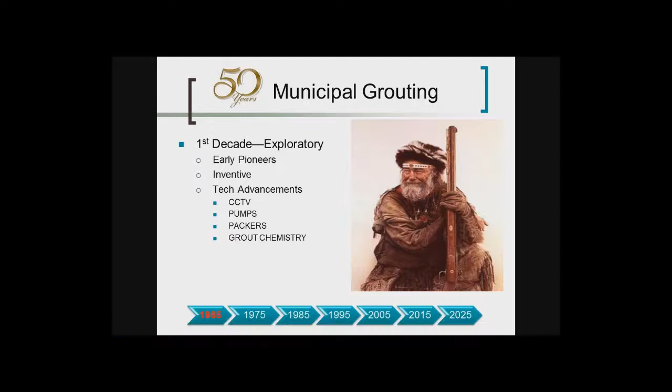The next 3 decades I affectionately refer to as Wild Wild West days. There were no industry standards, largely contractor-driven, and success stories were fairly inconsistent. Many of these current opinions and beliefs about grouting stem from this period, which is understandable and very difficult to change. In the last decade, we saw the introduction of standards.

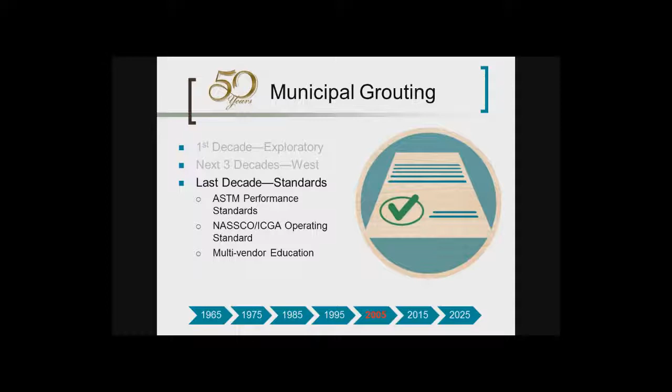Performance standards from ASTM, operating standards from NASSCO, have advanced the practice to far more predictable outcomes, and the vendor community has done well to teach these standards and preach their importance in everyday operations through grout schools and white papers.

The current decade, if I could use a single word, I would say quality is the one word that defines how the grouting community has changed so much today, much different than previous decades. There's a greater focus on science, new rules for contractors for injecting for longevity, and yes, there are certification programs on the horizon for inspectors and operators to make certain the value engineering elements of the specifications are followed to the highest degree.

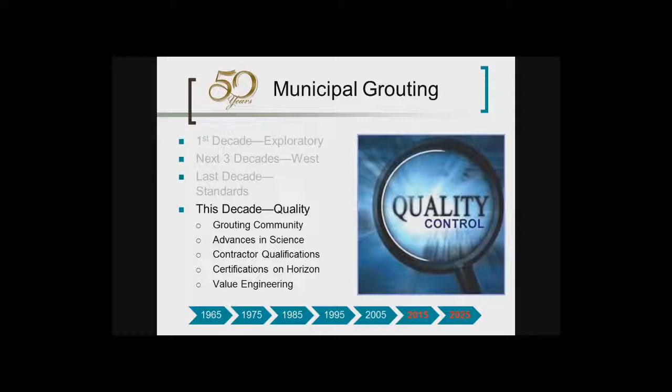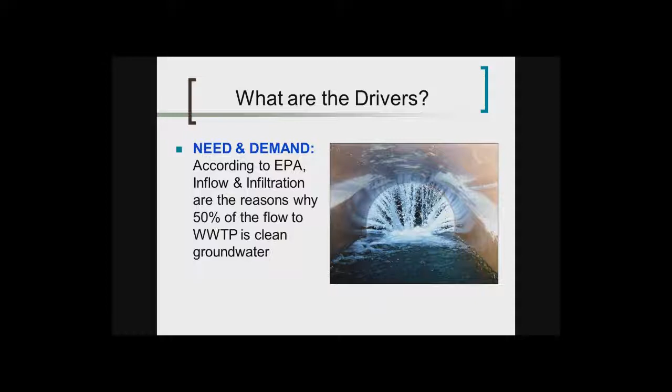So what's driving this momentum? Need is a driver. Demand is a driver. I&I is the reason half the flow to the treatment facility is clean groundwater. Not only is this a higher expense to the ratepayer, but it's also a contributing factor to the decay of underground assets, reducing the useful life expectancy of our collection system.

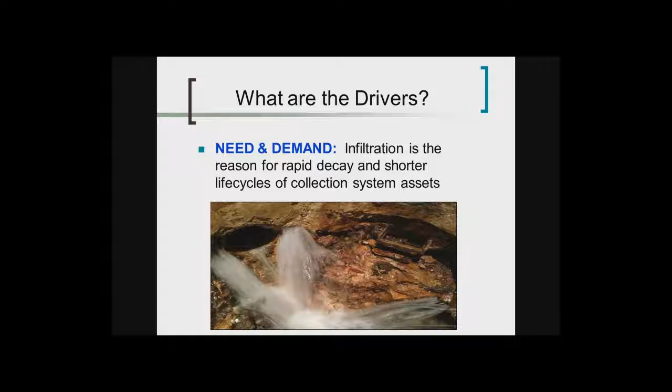In addition to unwelcome groundwater, infiltration ushers in soil fines, reducing capacity and adding municipal expense for jetting and cleaning the system.

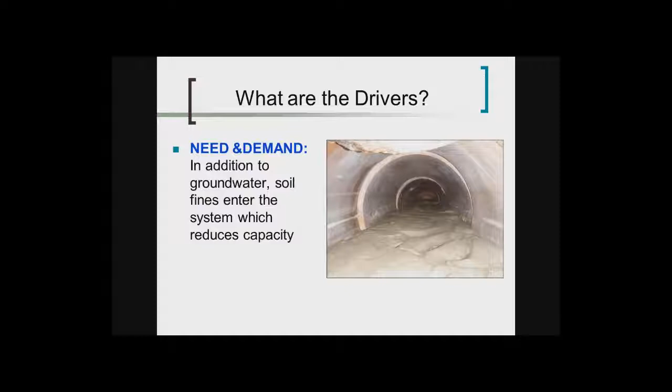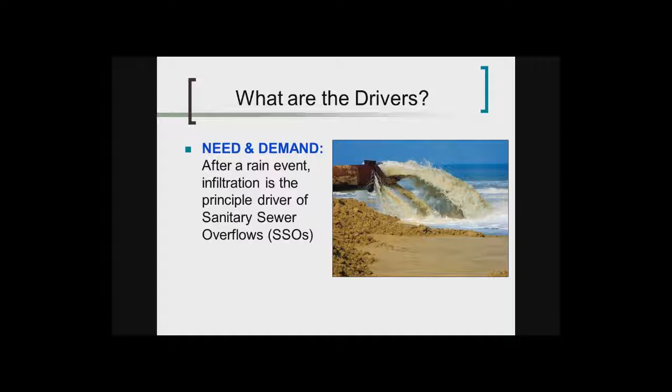Following a rain event, infiltration exacerbates conditions for sanitary sewer overflows, and nothing captures the attention of EPA greater than SSOs. Relative to the customer and ratepayer, basement backups are a public relations challenge for every municipal authority, and the public is deserving of a safe community.

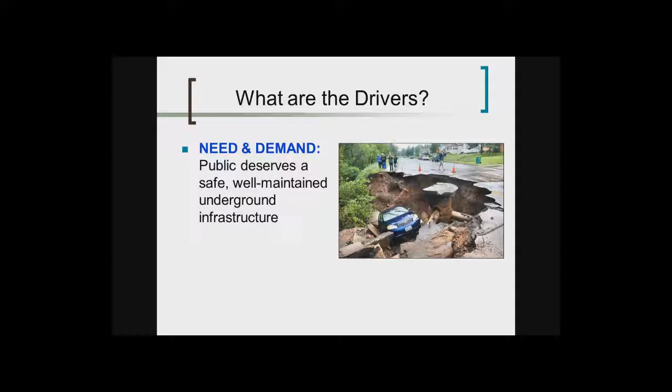Sinkholes are often the result of lack of maintenance of our underground utilities. Clearly, infiltration is the enemy. So what are we doing to maintain, repair, and remediate infrastructure?

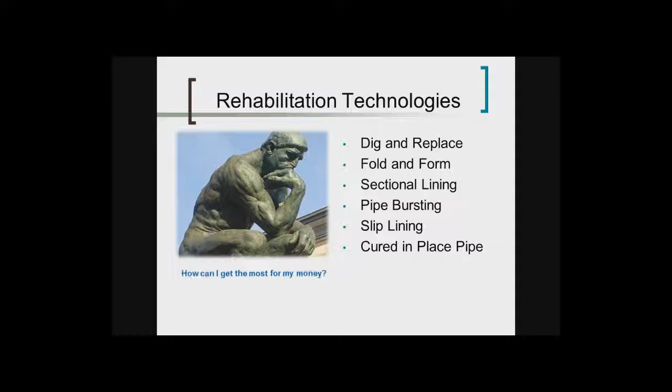Every day, I wake up grateful that these technologies exist. These are necessary and important technologies. And they all have one thing in common: they are structural, and they are also expensive.

Injection grouting is non-structural, generally speaking 25% of the cost of lining. Grouting is a complementary technology to lining versus a competing alternative. Your condition assessment guides you to an execution plan that may include both lining and grouting.

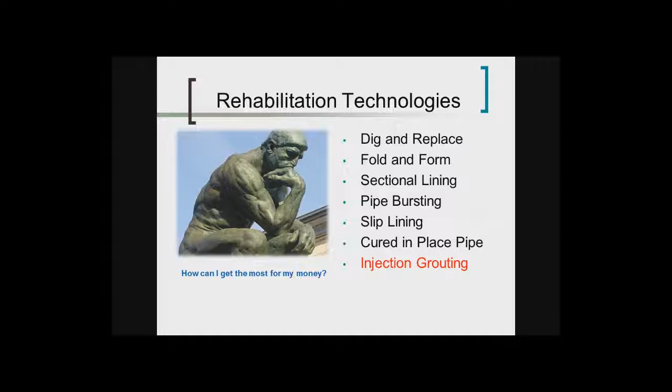And for structural rehab, lining is necessary. And if 80% of your defects are infiltration problems, injection grouting is engineered specifically to stop infiltration. Grouting is the only technology that stops infiltration at all four points of entry. To beat infiltration, a holistic approach targeting all four points of entry is required.

And that includes manholes, main lines, laterals, and lateral connections. This is exactly the wisdom you're about to hear from our next two presenters.

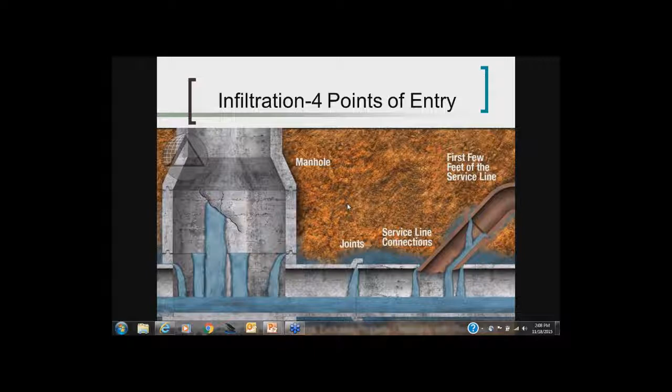As Don said, my name is Tony Conn. I'm the Wastewater Collection Pumping Supervisor for the City of Naperville's Department of Public Utilities. And I'm just going to go over a quick overview of the City of Naperville.

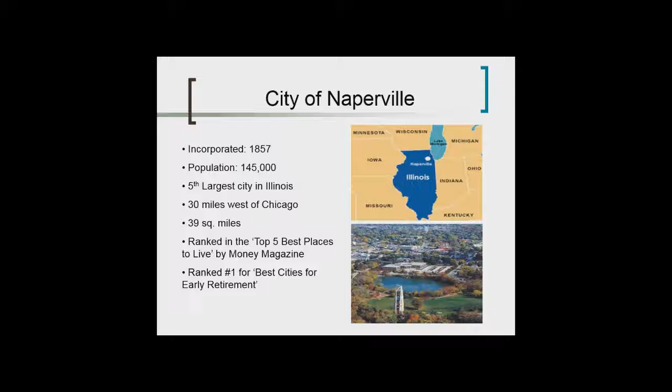We're about a population of 145,000 plus. We're about 30 miles west of the city of Chicago, with about 540 miles of sanitary sewer and just under 42,000 customers. We have one wastewater treatment plant, and we also treat the wastewater from one satellite community.

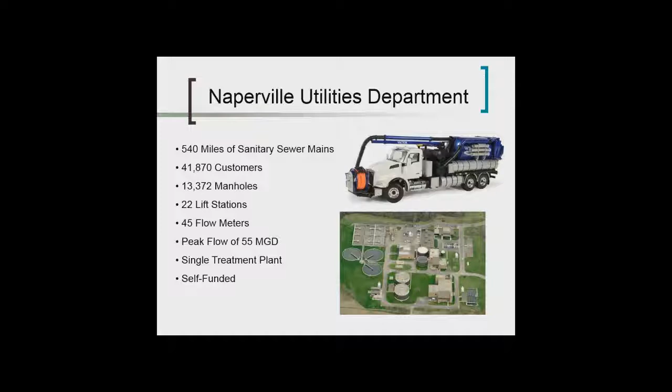Just a quick review of the sanitary sewer rehab work that's been done in the city of Naperville. Manhole rehab timeframe: we started in the late 80s with doing manhole renew, that is a poured-in-place manhole process.

And then in the mid 90s, we started using Permacast, that's a spun-in-place manhole process. Both of these processes were done in-house.

And then about 2001 to current, we started using SprayROQ, Raven 405, cured-in-place manhole liners, and Spectra Shield. These processes are used when the entire manhole needs to be redone, and they're also outsourced to licensed contractors.

If there's only an issue with the upper structure, in the city of Naperville we use LMK's cured-in-place chimney liner, and that work is done in-house.

Mainline lining: mainline lining we've done started in the early 90s. We use many different types of linings - inverted, cured-in-place, fold-and-form, pulled-in-place liners - and recently we just did several demos with ultraviolet cured-in-place pipe, which is a great product.

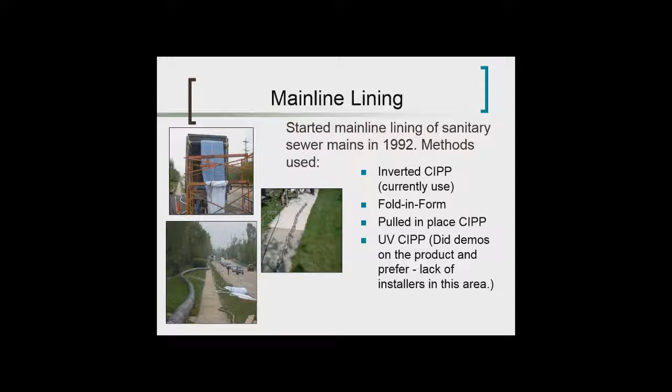It's just the issue that we're having in this Chicagoland area is there's a lack of installers for the UV cured-in-place process.

Lateral lining: we began lateral lining in the early 2000s. Before that, we were doing open cut and pipe bursting in-house for our lateral rehab work.

Currently, city crews locate laterals 18 feet onto the private property, and then city crews install a cleanout at that location. At that point, the laterals are lined with LMK's T-liner, and we go from the main line all the way to where the cleanout is installed.

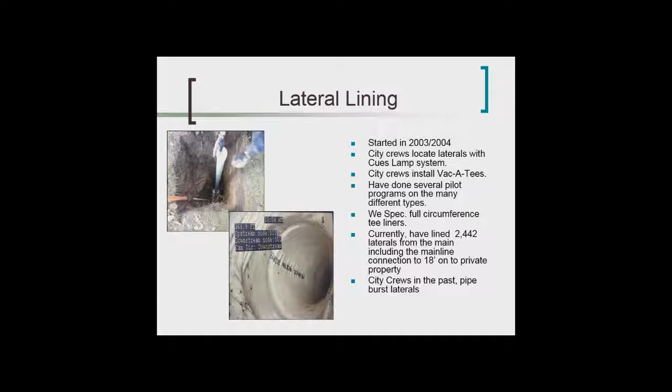This is done for two reasons: to get away from any storm sewer crossings, and to try to get the rehab work out of the groundwater table if possible.

In Naperville, we began mainline grouting back in the early 90s because of the large lining projects we had going on. The grouting got pushed back a little bit. The largest pipe done to date is a 36-inch reinforced concrete interceptor, done as part of a lining project to stop water migration and prevent resin washout when the liner was installed.

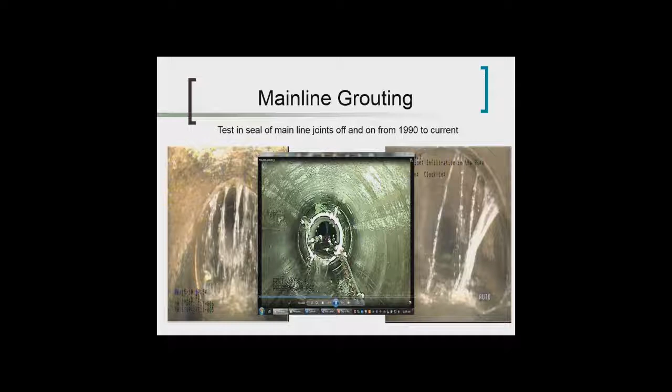Lateral grouting, test and seal of lateral connections, started around 1999 with just the first 4 to 5 feet being grouted, including the mainline connection. This was also pushed back due to our large lateral lining program in the early 2000s.

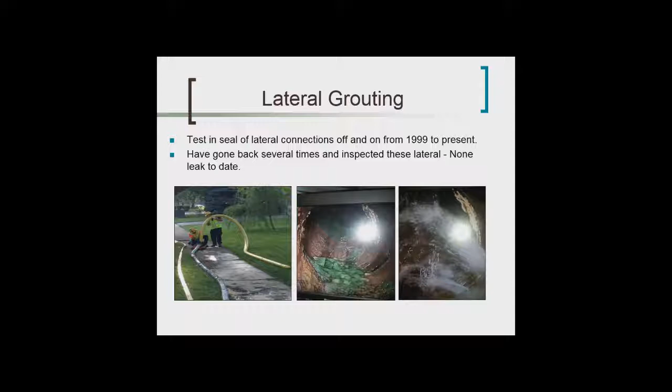All of the services that we grouted have been checked several times over the last several years, only under saturated ground conditions, and I could happily say that every single one we grouted shows no signs of leaking.

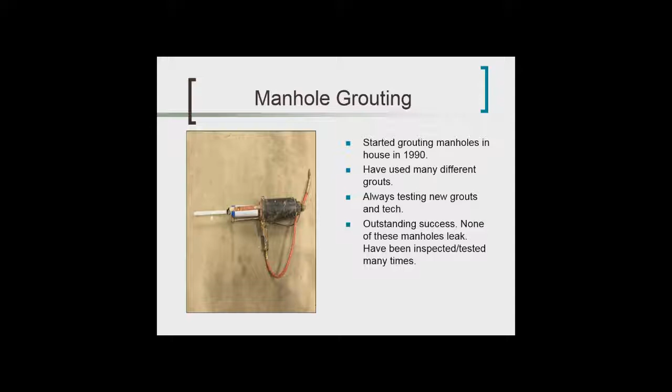Manhole grouting is done in-house with city crews. We've used many different makes and types of grouts, like urethanes and acrylamides, and sometimes both on the same manhole, depending on the situation. We've had some very great success with our manhole grouting process.

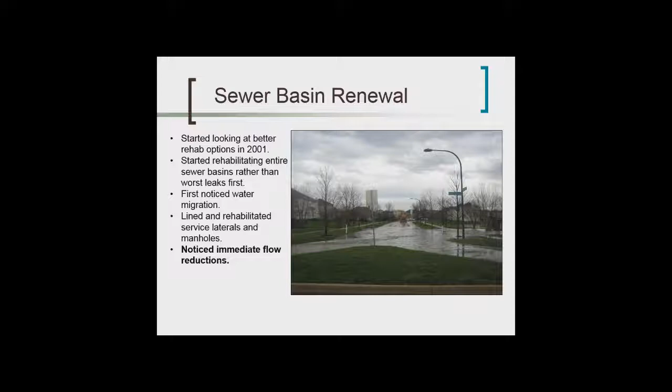Sewer basin renewal. After the 2001 rain event, we started looking at a better way of doing our sewer rehab work. During this rain event is when we really started noticing the issue with water migration. This is when we started rehabbing an entire flow basin instead of just jumping around fixing the worst leaks. After rehabbing the entire flow basin is when we really started to notice true flow reductions.

During a heavy rain event in April 2013, Naperville had about 7.48 inches of rain in a 48-hour period, resulting in a lot of flooding, a lot of street closures, and some basement backups.

After reviewing areas of all the backups where we had customer service calls, our flow monitor data, and our groundwater data, we prioritized some of our I&I rehab efforts to the Cress Creek area, which is the area we're really focusing on in this presentation.

After televising over 58,000 feet of sanitary sewer main lines, inspecting and locating 450 laterals, and inspecting 355 manholes, it was decided that the rehab of the main lines, manholes, and laterals was needed.

The problem was that the groundwater level was too heavy. All the groundwater leaks were too heavy just to line everything. Leaks had to be stopped first to prevent resin washout when we were installing our new cured-in-place liners, and before the manhole rehab process could be used.

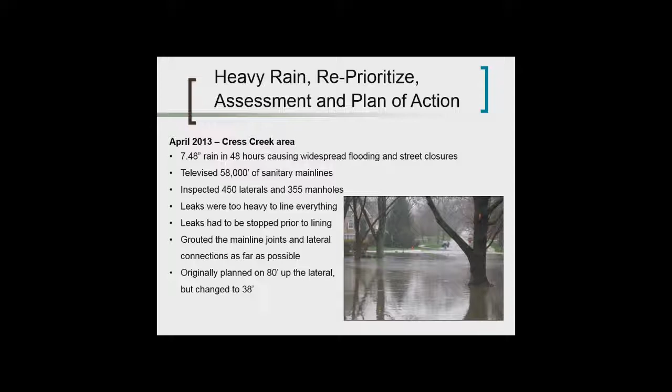We decided to grout the main line joints. We grouted the lateral connections and laterals as far up the service as possible. We originally wanted to go 80 feet up the lateral, but we ended up having to settle for 38 feet up the lateral.

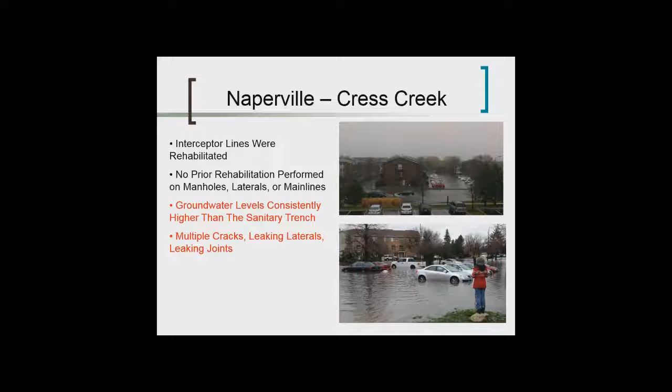At the time in the Cress Creek area, only the 24 and 27-inch interceptor and its manholes were rehabbed. The problem with the Cress Creek area is that the groundwater table is always high, and the sanitary sewer mains and laterals are constantly underwater, below the groundwater table.

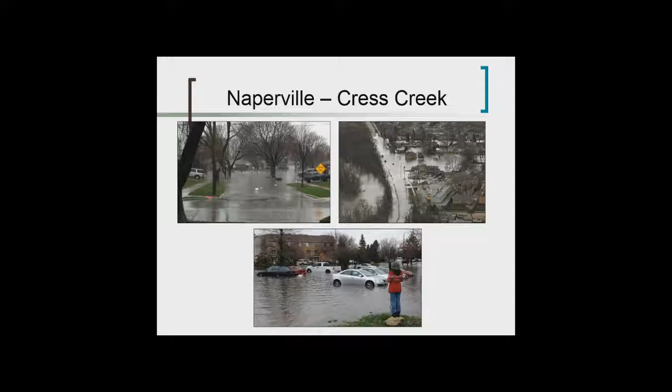Some slides of overland flooding during the 2013 rain event, and more flooding from the 2013 rain event in the Cress Creek area.

Water migration. After many years of our sewer rehab work, we noticed we were still getting high flows during heavy rain events. After lining mains for many years, we began televising this work under saturated ground conditions.

We noticed how the water was actually migrating between the host pipe and the liner and coming out where the service connections are reinstated, and also noticing water migrating to the termination points at the manholes.

During one of our large interceptor lining projects, you can actually see the groundwater table changing. The colors of the manholes were getting darker. Manholes started to leak. Service laterals that never leaked before started to leak. The water just migrated to all these defects.

This is when we decided to start grouting main lines before doing cured-in-place installs, to stop the water migration between the host pipe and the liner. Rehabbing the whole basin — the mains, the manholes, and laterals — to control the water migration is where we actually started noticing, again, true flow reductions.

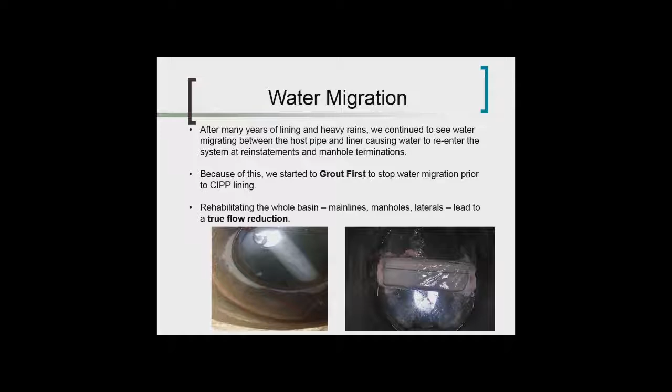Back to the manhole terminations, we also started using Insignia end seals and also Sikadur 31, both of these processes to seal the area between the host pipe and the liner at the manhole terminations.

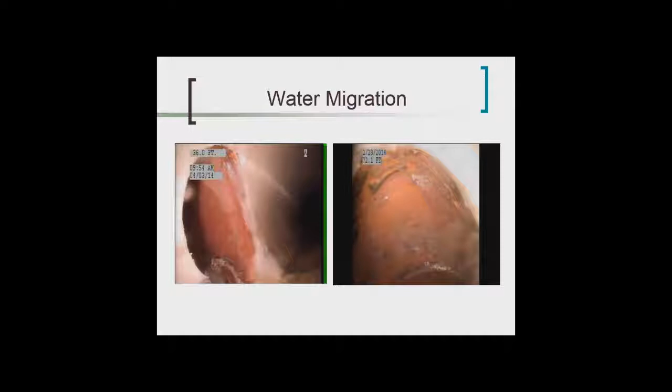These pictures show groundwater leaks between the host pipe and the liner at every service reinstatement. The photograph to the left shows water migrating and leaking between the host pipe and the liner at the top of the service connection and the bottom. The photograph to the right shows the groundwater leak between the host pipe and the liner at the top of the service connection.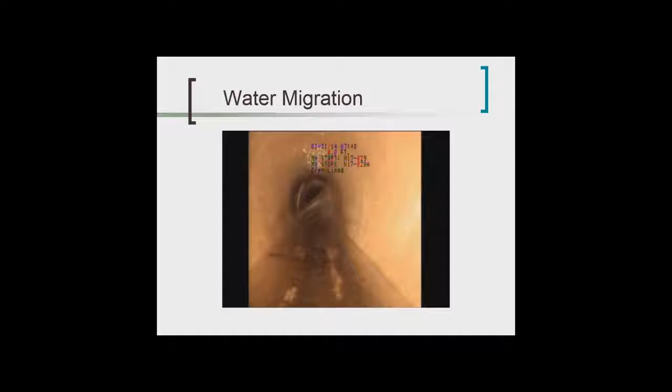The scope of work in Cress Creek: the city of Naperville lined with cured in place pipe over 57,000 feet of main lines and rehabbed 349 manholes with the Spectra Shield lining system. The last six are being done under the current manhole rehab contract with Raven, 250 mils of Raven 405.

These laterals will be grouted to stop groundwater leaks in four phases. Laterals are not being lined at this time because our service line lateral program is already committed to other areas, and the groundwater leaks have to be stopped before we can line these laterals, or we're going to have resin washout.

As part of Cress Creek, we first grouted about 2,500 feet of 12-inch clay pipe and 56 laterals. This was done for several reasons: to seal the main line joints to minimize resin washout when we installed the cured in place liner. If you have resin washout, obviously you're going to have soft spots and the liner is going to fail.

Another reason is to stop groundwater infiltration between the host pipe and the liner, and to prevent groundwater from backing up into basements when the cured in place liner was installed. That was a huge concern. We didn't want any basement backups with clear groundwater while we're trying to rehab the sewer line. Another reason was to minimize bypass pumping.

The goals were to prevent any future wastewater backups during a heavy rainfall event, to reduce I&I to the flows to a downstream pump station, improve the life of our sanitary sewer system, improve its performance, and of course reduce I&I.

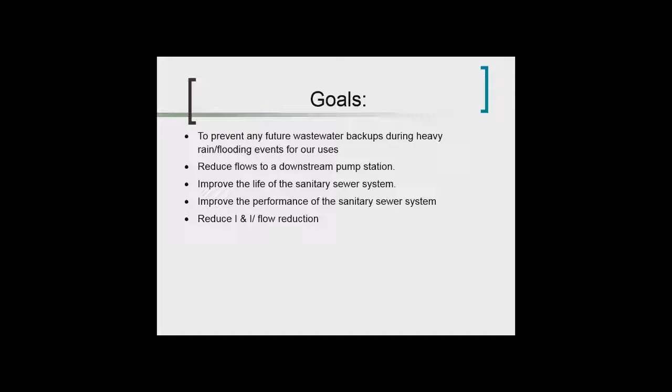Current results: this is an area that was grouted and treated with cured in place pipe and grouting, comparing June 2013 flows to June 2015 flows, which happened to be the wettest June in Illinois history. You'll notice we had 2.2 more inches of rain in 2015 than in 2013, and our groundwater level was 4.3 feet higher in 2015 than in 2013.

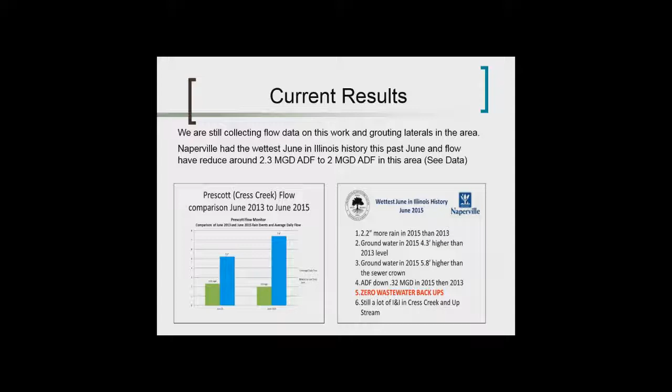But in 2015, our average daily flow from this basin was down 320,000 gallons, and we had zero wastewater backups, again, during the wettest June in Illinois history.

This is another graph showing flow reduction in an area where the entire flow basin was rehabbed using cured in place on mains and laterals, and grout and Raven 405 on manholes. Between 1999 and 2011, flow comparison shows our flows have gone down 760,000 gallons on an average daily flow.

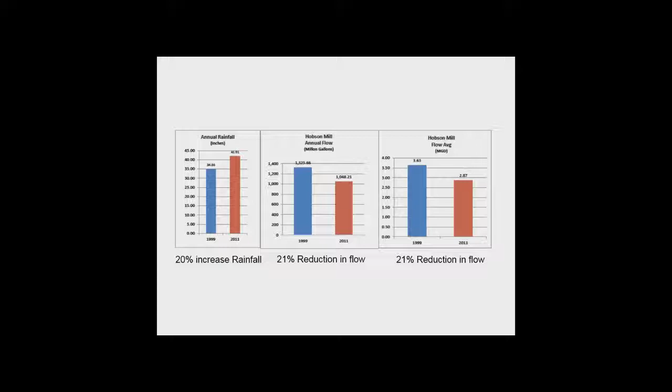This graph is showing citywide flow reductions. It shows how the city of Naperville's population has gone up, but the flows to the treatment plant have continued to go down, comparing our 2000 flows to our 2014 flows.

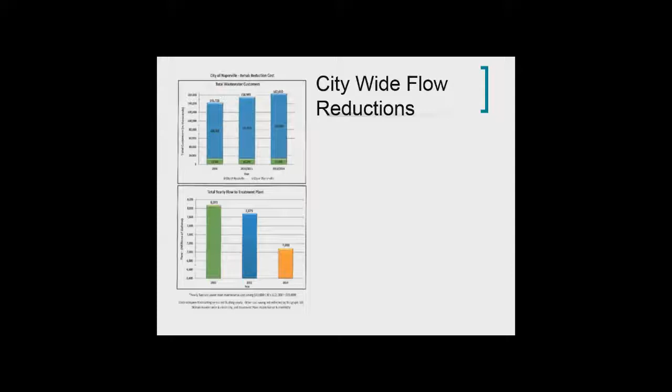Thanks, Tony. Hi, everybody. John Manijak, National Power Rodding.

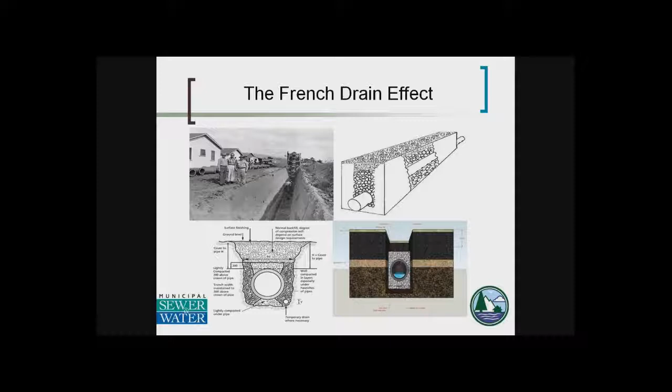When we first built our sewer systems, we dug a trench, laid the pipe, backfilled it with rock, and then covered it up. Now we have systems that have open joints, cracks, fractures, break-in taps, and there is virtually no difference now between what we have and a French drain system.

Water migration is real. Water flows along the sanitary trench and surrounds our pipes. It enters the sanitary systems through any open point.

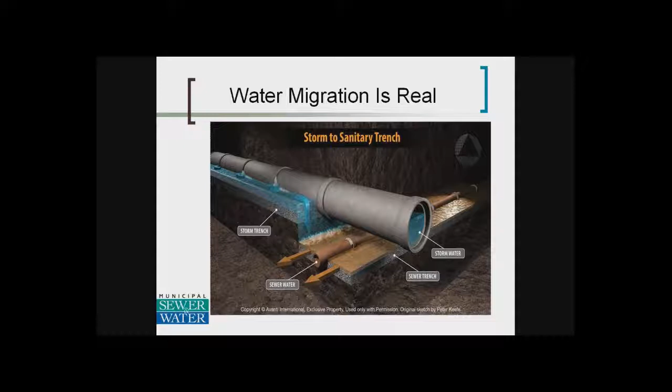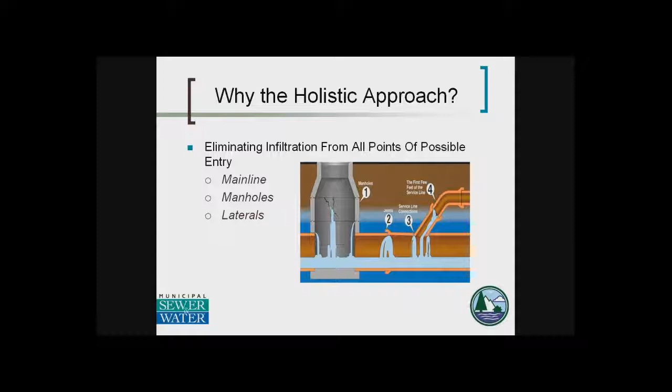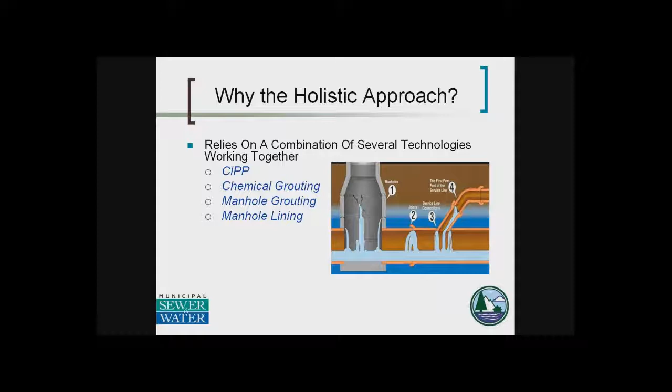And that is why the holistic approach to eliminating I&I really works. You need to address every possible point of entry: the manholes, the main lines, the lateral connections, and the laterals themselves. The holistic approach relies on a combination of several different technologies working together in order to eliminate any source of infiltration.

Cured in place pipe is a great structural solution to cracked and fractured pipe, but it is a known fact that cured in place pipe has an annular space, and many of us have lined a lot of pipe with the idea that it will completely stop infiltration.

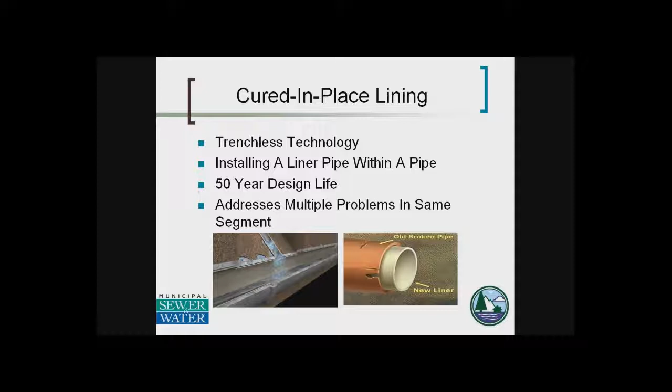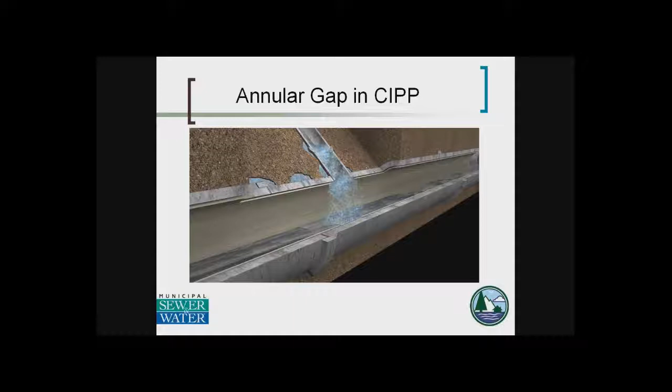The fact is that cracks and open joints are still in the host pipe, and water will enter them. It'll travel along that annular space and then re-enter the system at the lateral reinstatements. The only way to eliminate this problem is to line or grout the lateral connection.

We can seal lateral connections in lined pipe with chemical grout by using a lateral packer, which you see here, and a lateral sock, which is the yellow piece. The packer is pulled into place, it's lined up with the lateral connection, and both the packer and sock are inflated.

After failing an air test, the chemical grout is then pumped into the annular space and through the open joints of the lateral to the outside of the pipe, where it gels and seals. It seals both the lateral and the lateral connection, and actually seals the annular space. An air test is then performed to verify that the pipe has been sealed.

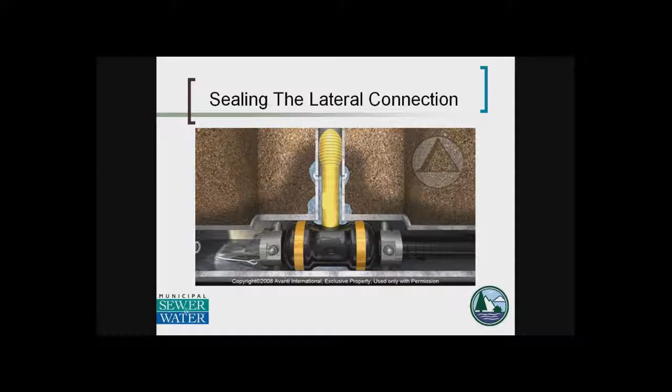In the Naperville Cress Creek subdivision, on this particular street in pink, the laterals and the main lines were leaking so badly that cured-in-place could not be attempted, because the incoming water would have washed out the resin before it would have cured, and then we would have had a failed liner.

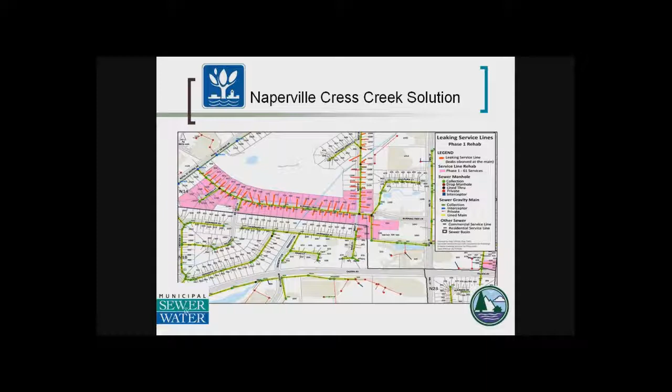National Power Rodding was hired to grout the laterals using a 38-foot lateral sock. In order to prepare for the successful deployment of that sock, we set up a main line and a 50-foot lateral in our shop and practiced the insertion of the equipment and the sock itself.

We determined that it would take a minimum of 4 minutes for the grout to reach the end of the sock and then saturate the ground outside that pipe. We experimented with different grout mixtures in order to give us the desired 4-minute reaction time that we wanted.

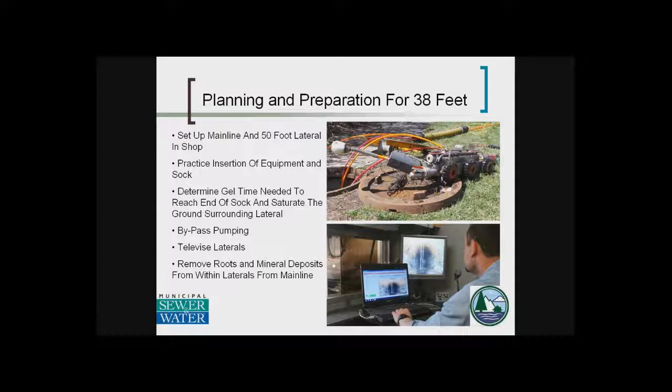When they say that the first days are always the roughest, they weren't lying. These are some of the pictures from our first day out there.

The lateral sock above ground is in yellow, and the gray piece that you see next to it in that top picture is the 45-foot tail, the housing for that sock. That also had to be inserted into the manhole.

It was also the middle of the summer, so the outside temperatures really affected our gel time. The crews had to learn to cool down the chemicals in order to get back to our 4-minute reaction time.

Once we got everything in place, we had to adjust our vacuum pumps and actually add a supplementary vacuum, because the additional water in the line was preventing the sock from coming out and going into that tail.

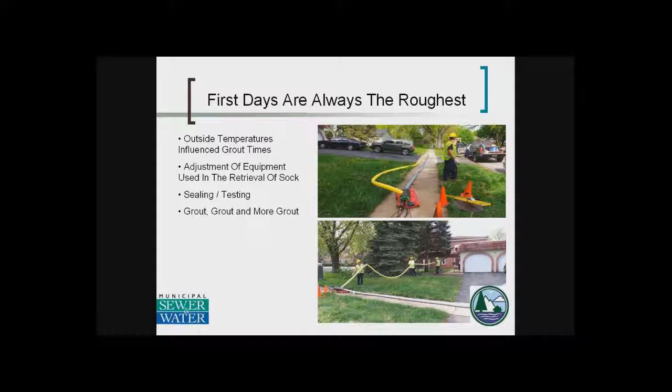Now there were a number of lateral connections that had multiple connections or multiple laterals wyed together before they connected to the main line. For these, we used a sausage packer, such as the one you see in the third picture, in black.

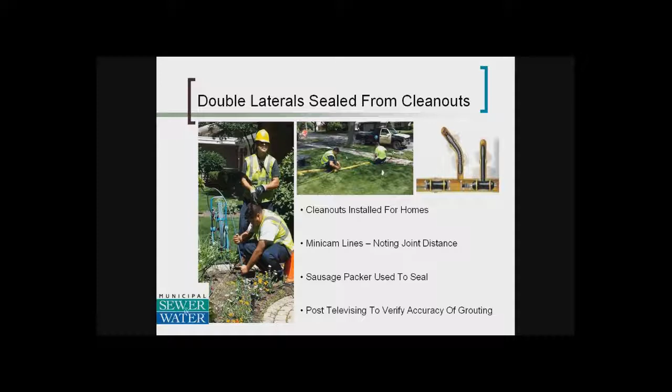That was inserted through the cleanout and then pulled to each joint of the lateral. Each joint was then grouted individually.

And then finally, to complete the process, all of the mainline joints were sealed using a mainline sealer and the test-and-seal method.

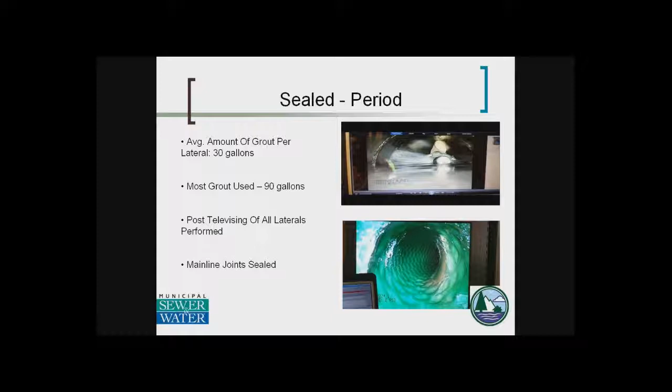And it's never over until it's over, is it? After the grouting was completed, the main lines were lined, and the only thing left to do was line the manholes. That's when Tony called me and said, hey, we have a problem. The water we stopped from coming into the lines and laterals actually migrated to the only other point of entry, the manholes. So we sent the crews back out and grouted the manholes so the lining could be completed.

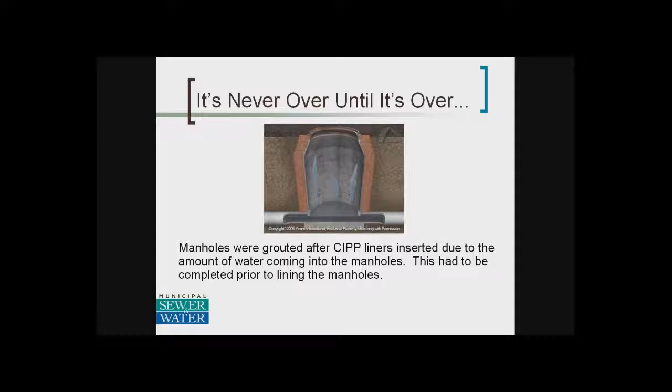Thank you, Luke. Our first online question: how do you know grout will stay in the annular space between the host pipe and liner?

Well, I'll answer that one. That's actually a very, very good question. I've been asked that many times before. When we grout, we use an air test to confirm the joint or space is sealed. To determine the pressure at which we test, we calculate the maximum head pressure we'd have at the level of the sewer line. So we take the level of the sewer and divide by 2, then add 2 psi. If a sewer is, for example, 20 feet deep, we divide by 2, giving us 10, then add 2 psi, so we'd test at a minimum of 12 psi. If it holds at 12 psi for 30 seconds to a minute, I know there's no possible way the head pressure from the groundwater would push the grout out of that annular space.

Thank you, John. Now let's do another quick poll question. In your opinion, is injection grouting for municipalities an engineered construction project, a proactive maintenance practice, complementary to other trenchless technologies, a short-term point repair tactic, or all of the above?

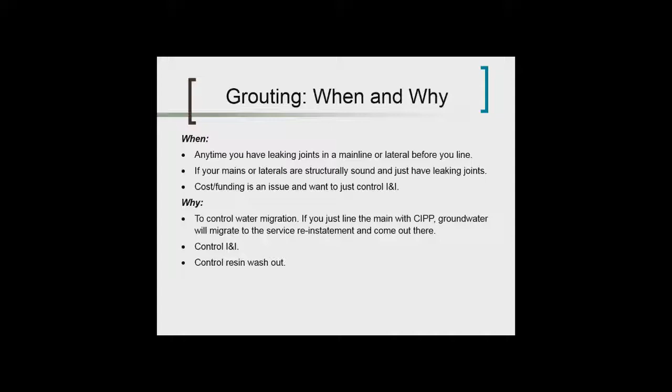Lining, when and why? Anytime you have a structural issue, when the system is at the end of its life cycle. And why line? To improve the life of your assets, improve the structural integrity of your assets, and by lining the main and the lateral, you can reduce your maintenance cost — for example, flushing on a longer time frame compared to an area where you're root cutting or doing root control yearly.

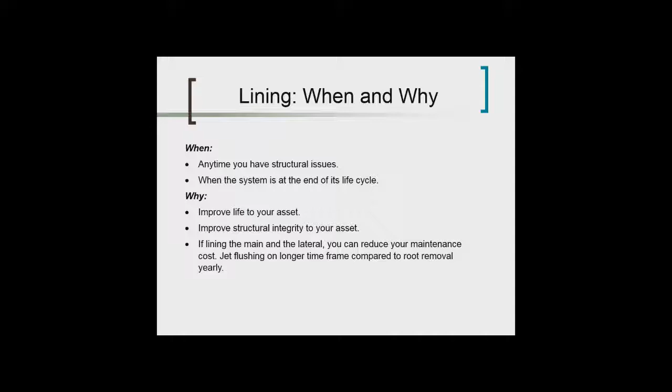The next phases of grouting in Naperville will be done with National Power Rodding, grouting 312 service laterals from the main line to the foundation of the home. This is being done in 4 phases over 4 years.

This process will include grouting the mainline connection up 4 feet with a lateral packer, grouting from the cleanout to the mainline connection, and then flipping around and grouting from the cleanout to the foundation.

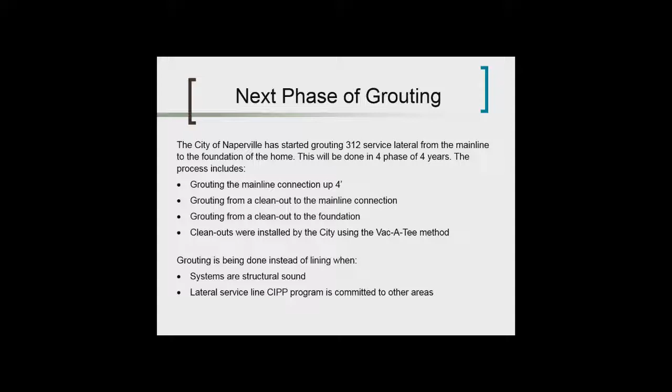The cleanouts for this first phase were installed by the city of Naperville using the Vac-A-Tee method. Grouting is being done here instead of lining because the services are structurally sound and our current lateral lining cured-in-place program is already committed to other areas.

Future grouting: this is just the first phase of the 4 phases. Again, the mainline connection and the laterals from the mainline connection all the way to the foundation of the home are being grouted. It's approximately 62 homes.

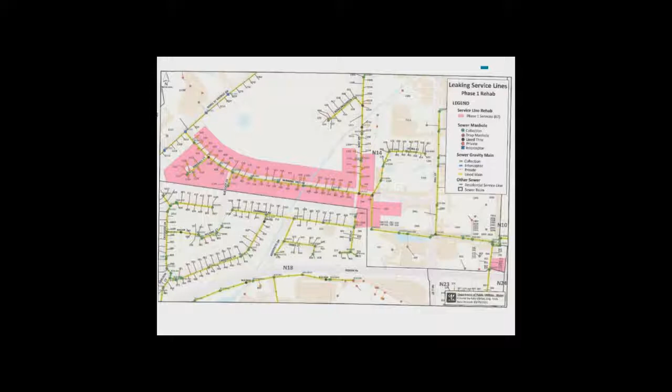Working in private property, using public money on private property, all it does is benefit the public good. Reducing I&I in private property benefits both public and private parties. One of the biggest things is keeping everybody educated on how handling private I&I will control many issues. Always keep your city council and boards involved, and talk to homeowners associations and private owners, keeping them involved also benefits the program.

And with that being said, I'd like to pass it on to John.

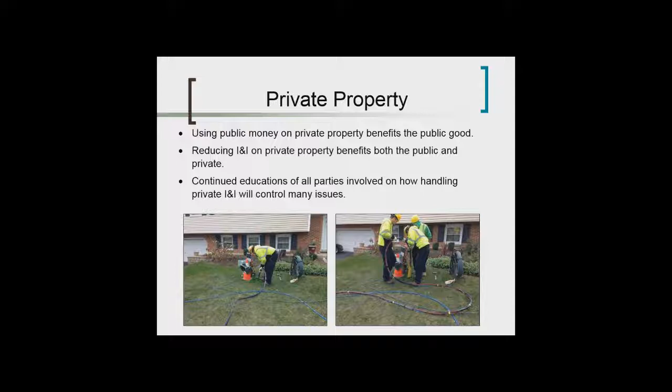John, you're now presenter. All right, there we go. Thanks, Tone.

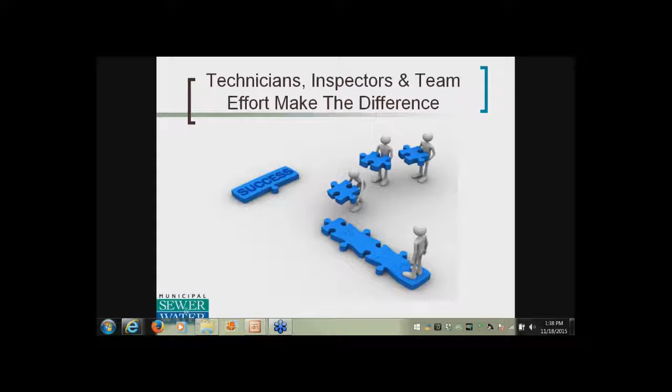Every project has the potential to be a great project, and at the same time, every project has the potential to be a very terrible project. What is it that makes the difference? It is the technicians, the inspectors, and the overall team effort that really do make the difference.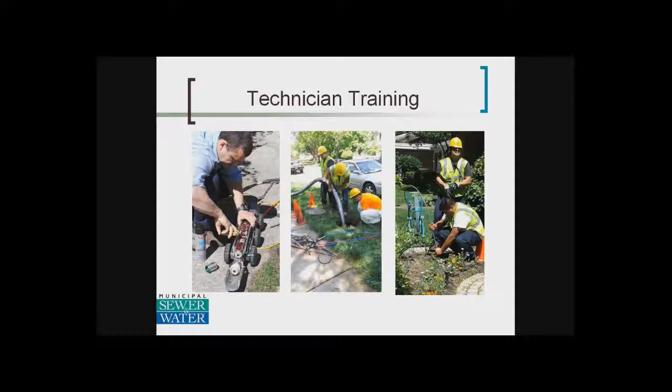Even before we mobilized our equipment to Naperville, we began the project. We began to prepare the crews by going through every phase of the project with our operators both in the office and in the shop, starting with the lateral cleaning and televising equipment maintenance, then experimentation with controlling the chemical grout reactions, and finally practicing the insertion and extraction of the 38-foot lateral sock and the 45-foot tailpiece. By having prepared our guys before they even went out there, we were already set up for success.

Training is very important, I cannot express that enough. But experience is essential. Anybody can be taught to push a button or pull a lever. In order to be successful in grouting, or in fact any phase of business, you need experience. A grouting operator needs to know how to react when something just doesn't feel right or the hoses start to get grouted shut, and this can only be learned through hands-on experience.

There is a Grout School out there that's been put together by some of the manufacturers, and that gives operators, both new and old, a chance to learn from one another.

Grouters also need to go through safe practices certification every 3 years. This teaches operators the importance of PPE and how to properly store and handle the chemicals.

Technicians should also be 40-hour HAZWOPER trained, as most of the work that we do as grouters is performed either inside a manhole or inside a pipeline.

In 2012, NASSCO and ICGA published a standard specification for chemical grouting to serve as a guideline for the industry to follow. In it are detailed descriptions of standard grout and packer tests and how to determine the minimum pressures at which we need to air test.

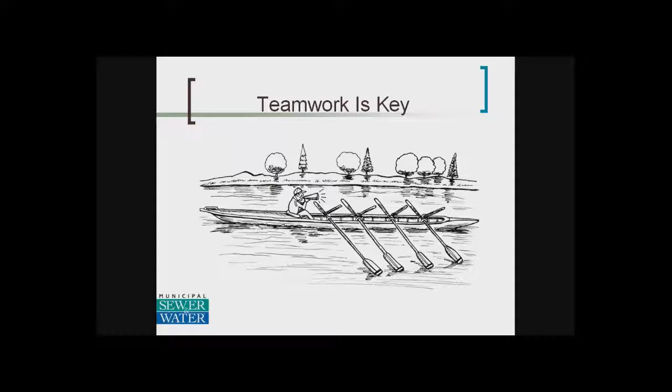All right, John, thanks. I know how passionate you are about this business, and you make a great spokesman for National Power Rodding. So let's recap what we heard today from Tony Conn and John Manijak.

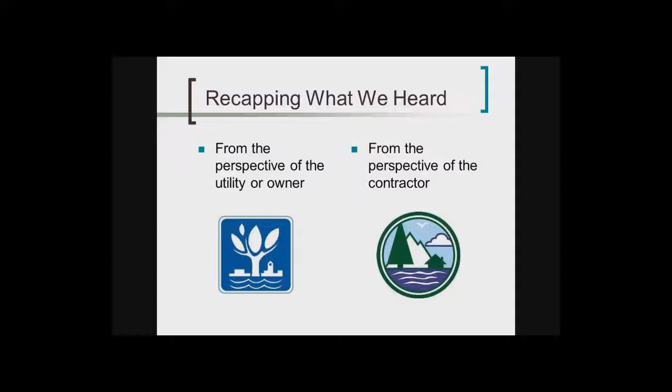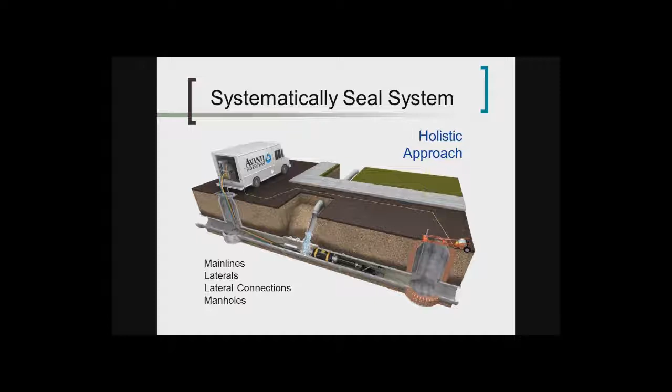From a collective perspective, from both the utility owner and the contractors, here's what we learned today. First and foremost, a holistic approach. Attacking all 4 points of entry is required to control infiltration. Conventional wisdom is to rehab main lines with CIPP lining, but lining does not stop infiltration. It reallocates it to another point of entry. And because groundwater table will rise, as we heard from John and Tony, the 4 points of entry includes manholes, main lines, lateral connections, and laterals.

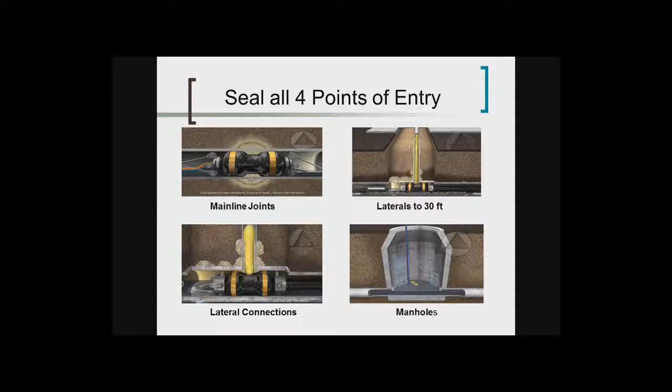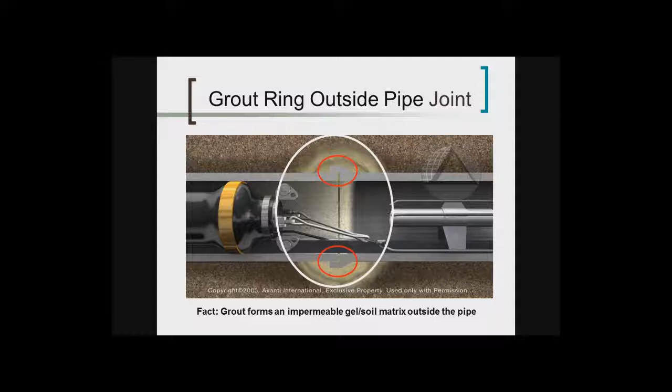At least up to the first 5 or 6 feet of the lateral. If you don't go 30 feet, at least get to the first initial 2 joints. Injection grouting is a soil sealing process, and it builds an impermeable matrix outside the structure. What remains in the joint is secondary to what's outside the pipe to stop infiltration.

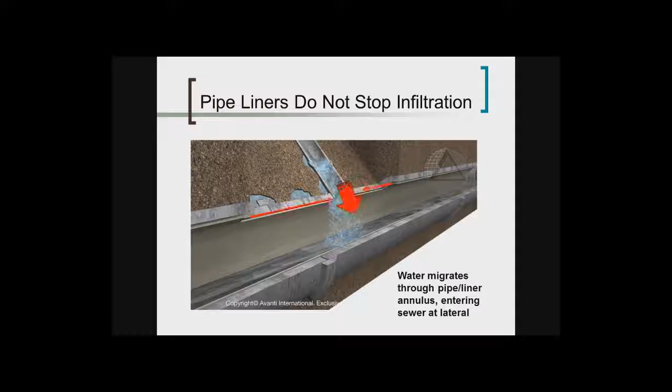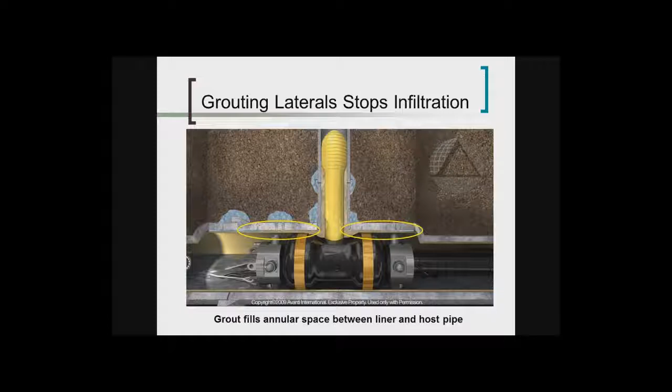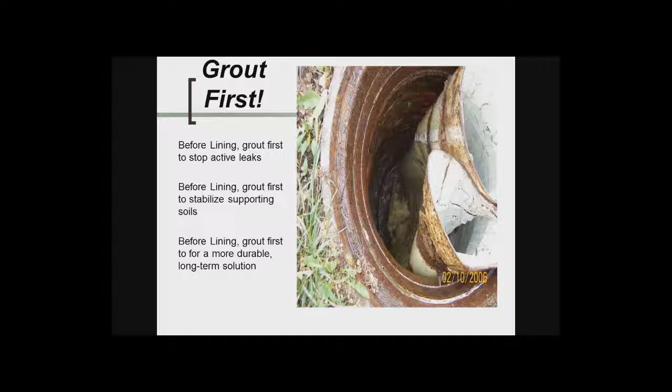Simply reinstating laterals after a lining reintroduces infiltration. We heard that loud and clear. Sealing the annular space between the host pipe and liner at the lateral connection and the manhole termination is necessary. As Naperville discovered, grout first may be the right approach for other municipalities for all the right reasons—stopping active leaks, stabilizing the soil for a more durable long-term solution.

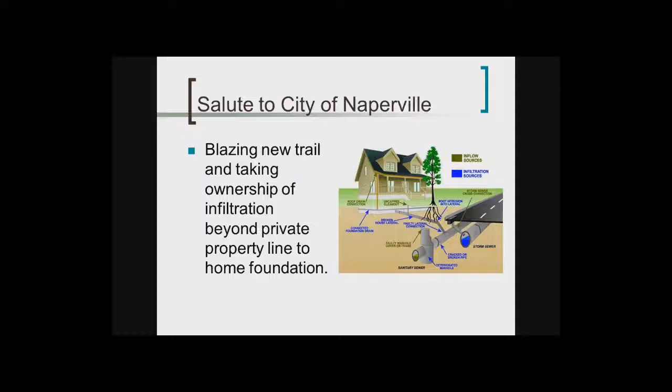Let me take a moment to recognize Tony Conn here, because he's truly taken ownership of infiltration further than most municipal authorities. Grouting laterals all the way to the foundation is not common practice today, but I'm betting it will be. Tony, thanks for being another true pioneer. And with that, I'll turn this presentation back over to Luke, our moderator.